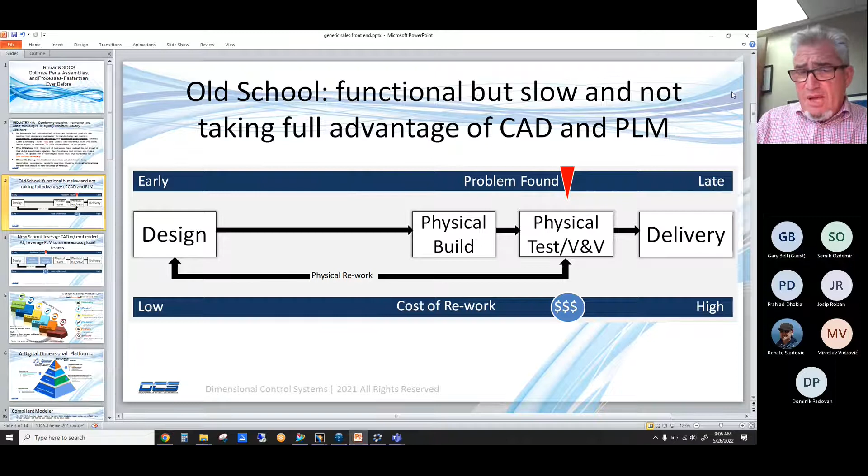We do a 3D model to still flip out a 2D drawing, but when there's changes from the customer, when there's issues with tooling, when there are design requirement changes, the back and forth takes a lot of time, costs a lot of money, and impacts launch, impacts quality and production. But now you've got CATIA, you've got the 3DEXPERIENCE.

Our fundamentals are tolerances and assembly moves, how your parts index to each other, how they index to a tool. But you can also embed that information in the experience. So you can embed GD&T in CATIA. We'll extract it with a button click. You can extract the assembly sequence in CATIA. And if it's set up right for us, we'll extract it with a button click. And this is putting our customers in a position where, of course, you've got to do physical builds, but you get to that point with a lot more confidence and much faster than ever before. And now when the customer makes changes, you'll have the ability to respond very quickly.

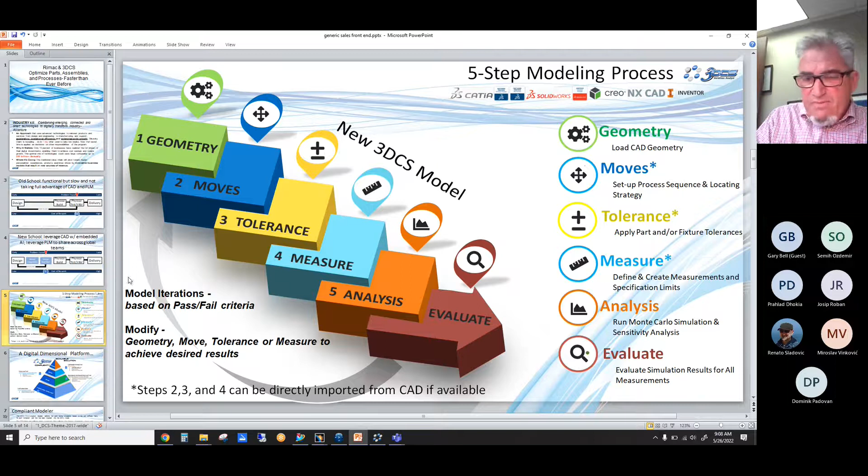These are our fundamentals. And I'm going to turn it over to Gary. And don't hesitate to ask Gary questions as we go through the demo today. We are going to share an electric motor with you, so it should be quite appropriate. Gary? All right, thanks for joining, everybody.

So when we're going to do a 3D tolerance analysis integrated, we refer to it as a 5-step modeling process. We start out with the design. Because we're integrated in the CAD system, you just open up your assembly and you can go to our workbench and start. We have to define how the detail components index to each other. In our workbench, we call those moves. That can be done by us, or if in the CAD system you're using CATIA's joints and constraints, then we can directly import those, and step 2 would be automatic as opposed to creating them in our workbench.

We have to tolerance our detail level parts to represent the expectation of the quality of the detail components. That's the GD&T that you would put on the drawing. That can be done in our workbench, or if you happen to be using CATIA's FTA, functional tolerancing and annotation, then we can directly import that in step 3. It becomes automatic. We have to write measurements where we want to validate our design from a dimensional standpoint.

Gaps, flushes, clearances, virtual clearance to make sure bolts pass through. Those are our measurements, which again can be written in our workbench. But if you have assembly GD&T or assembly FT&A, we can pull that in as our measurements. Because the goal is we want to know that our part tolerances and our assembly method will meet our assembly dimensional requirements. So there's really 3 main inputs: moves, tolerances, and measures. And then you're going to click a button, run an analysis, and we get to evaluate the results.

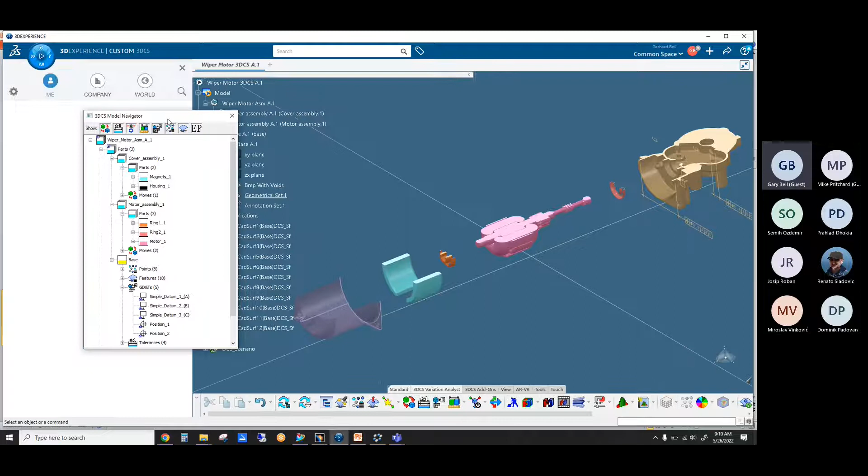So with that, I'm going to jump over to 3DX. This is 3DX 22X. It's easier for me to say V6 if you guys are okay with that. Inside V6, if you go into the compass, when our software is installed, we are right here, 3DCS. So you just click on 3DCS and you get all of our icons down here, and you can start doing your tolerance analysis. Now, one of the key things is we don't save any data on the parts. That would dirty up the parts.

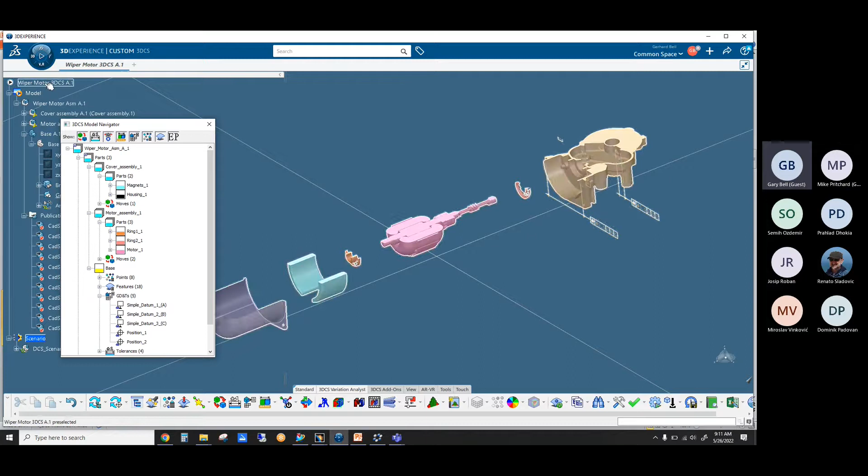If you're familiar with V6's manufacturing simulation or kinematic simulation, you can see up here with this arrow, that means I'm in a kinematic or manufacturing simulation. And then the model is inside that. And all of our data is saved here. There's our navigation tree, which is going to document the moves, tolerances, and measures. And this tree is linked to the CATIA tree, our tree, and the part. So if you see when I click around, it highlights it in both trees.

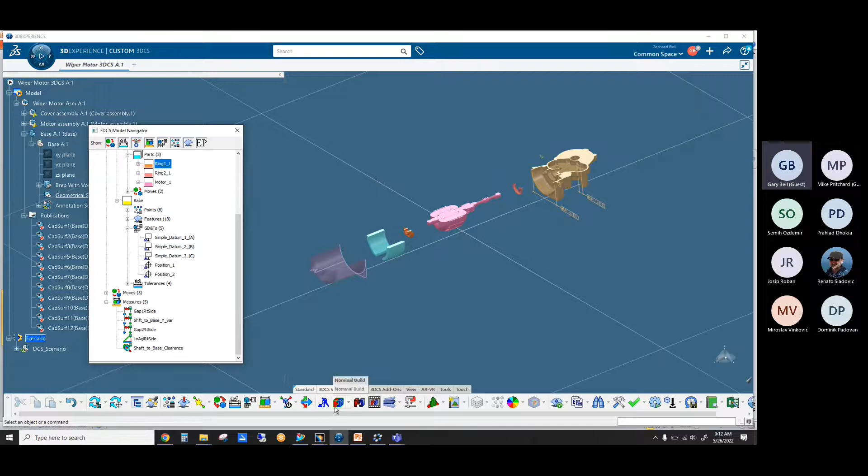The difference is in our tree, we have moves defined, we have tolerances defined, and we have measurements defined. You can see everything is graphic based, so if I mouse over the measurements, it's going to show you where the measurements are. If I mouse over the tolerances, it shows you where the tolerances are. And then this model is complete. So the first thing I'm going to do is I'll just assemble it and zoom in.

This is a cut section through a simple electric motor. And when I hit deviate, we can speed that up, I think. Okay, you can see this thing is jiggling around. Every time this number down here changes, we're building another motor assembly. Each motor assembly is going to be different because we're independently applying the random tolerances to the piece parts and then building it, similar to what will happen on the plant floor.

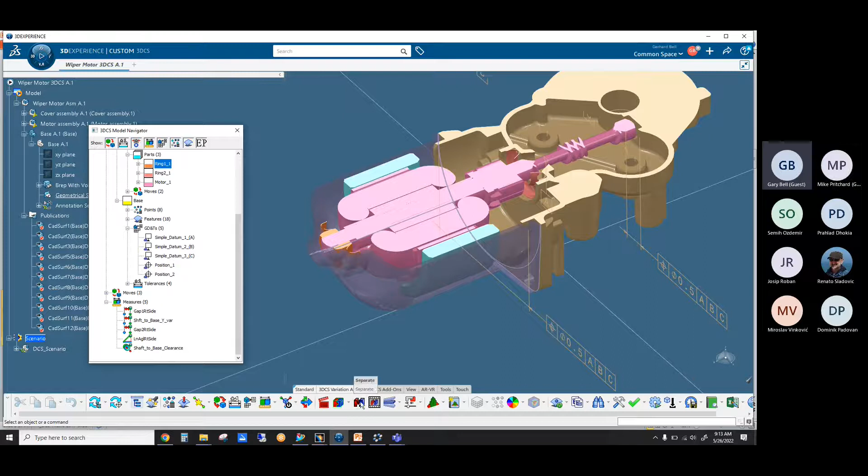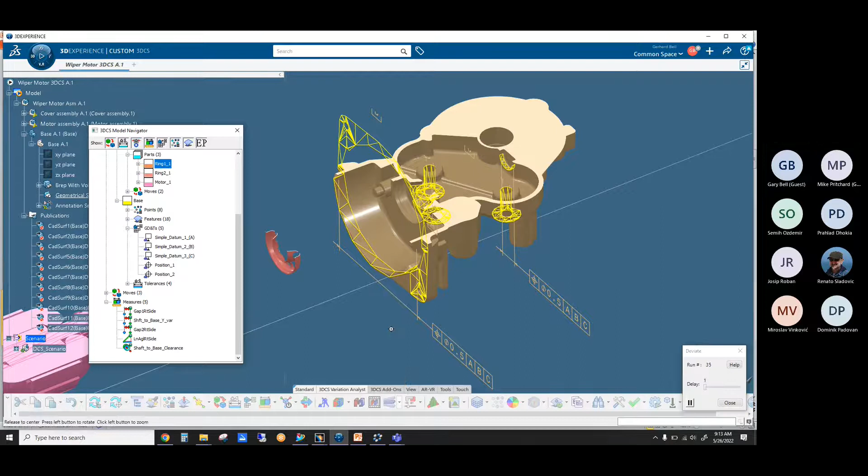If I separate this, I'm going to turn my mesh on, and we focus just on this part here. You can see this part's got some GD&T on it for the position of that hole and the position of this flange. And there's some other mesh on here. If I hit deviate in the separated position, now you can see things moving around. And this is us simulating these part tolerances. So this is that flange moving, diametrically 0.5 back to the part datums. So this is us simulating piece part variation.

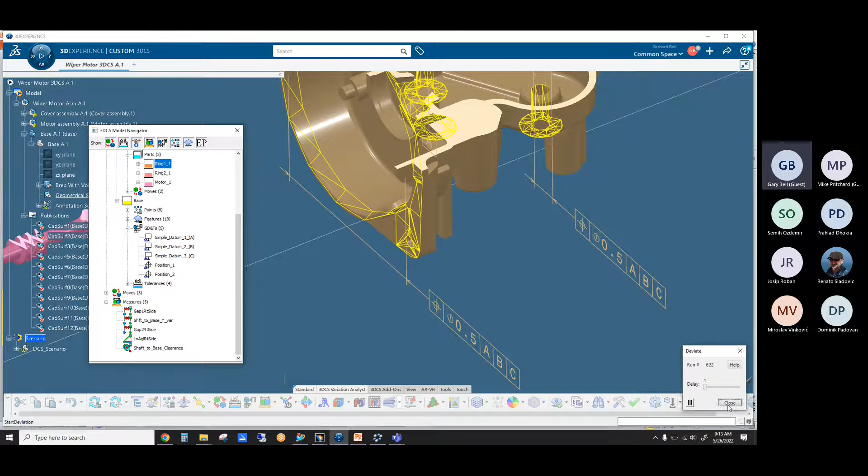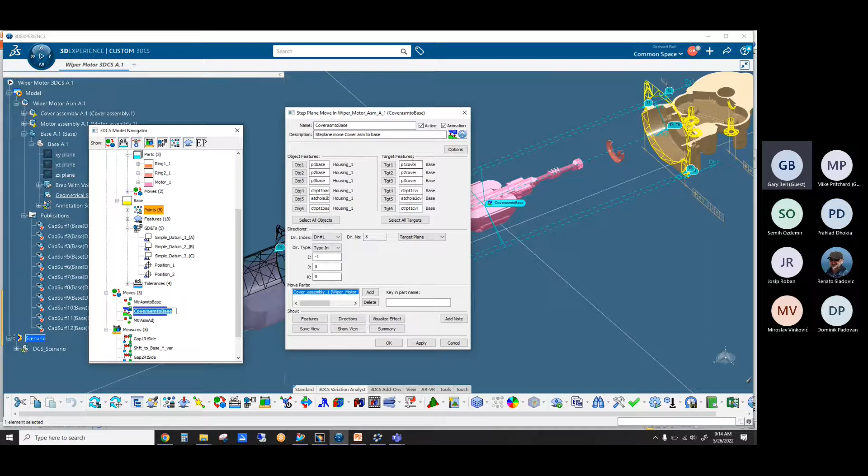And if I come down here and I click on the move, if I go into this move, you're just going to pick features on the housing and tell us what they locate to on the base. So this is the move that locates this cover to the base. And there's moves. You can see this model is a subassembly. So there's a motor assembly, which consists of the motor and some bearings. And there's a cover assembly, which consists of this magnet and the housing.

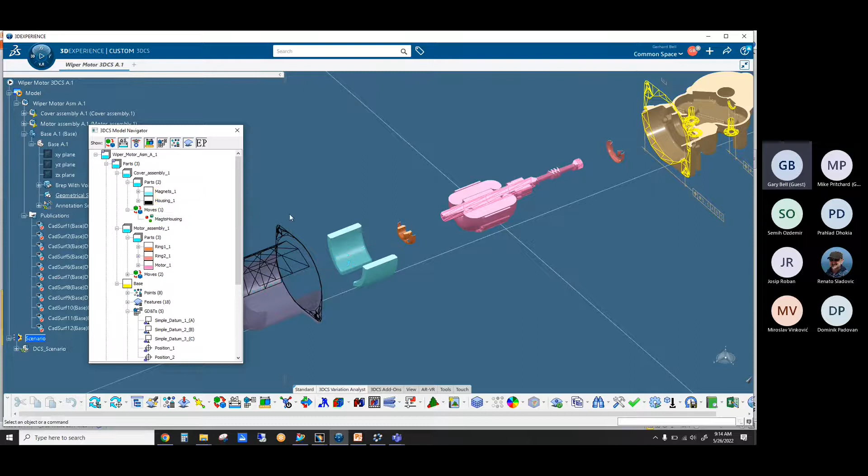And there's one move in here to locate the magnets to the housing. So these moves are going to simulate the build sequence. So then I can go through here. Oops, wrong button. I can go through here and I can animate through the assembly sequence. Oh, what happened there?

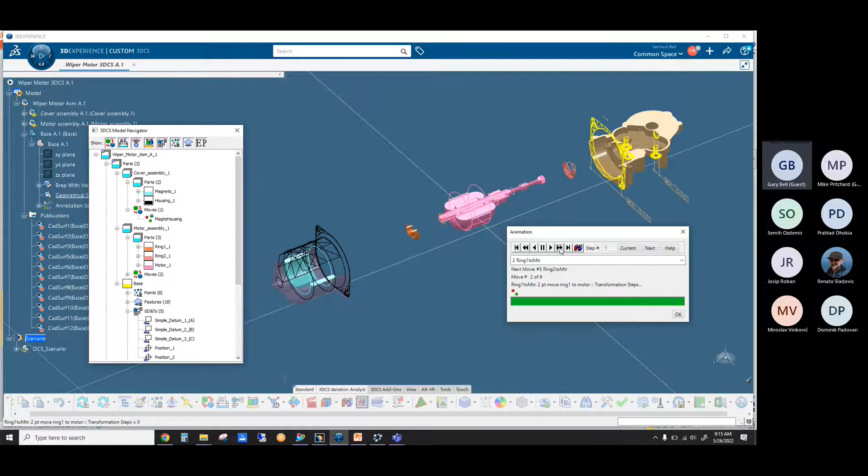Separate. Whoops. Separate. Animate. It looks like the solids has got a lag, but if I animate it, the magnet goes in, the bearing packs go on, the motor goes in, and then the cover goes on.

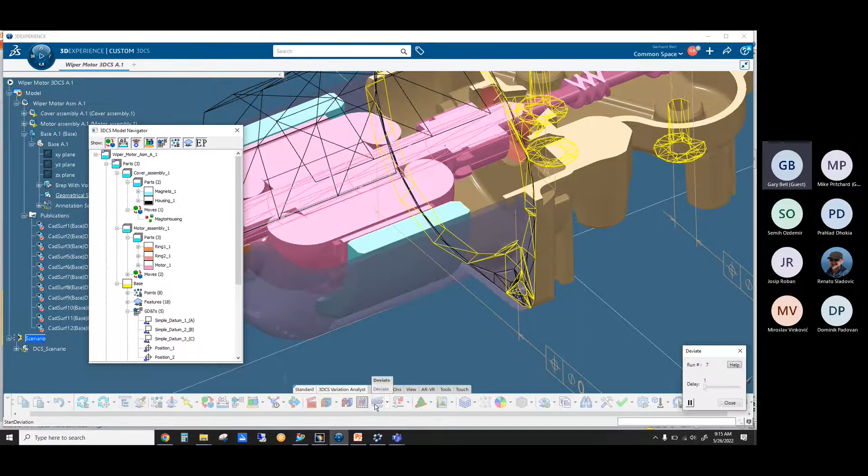So now if I zoom in here, because the move was this cover locates to that flange, when I hit deviate from here, that flange is moving, which affects where the cover goes. Where the cover goes affects where the magnet goes. That also affects where this bearing pack goes, which affects where the motor goes. So you don't have to think about a tolerance stack path. You just have to define how your parts go together.

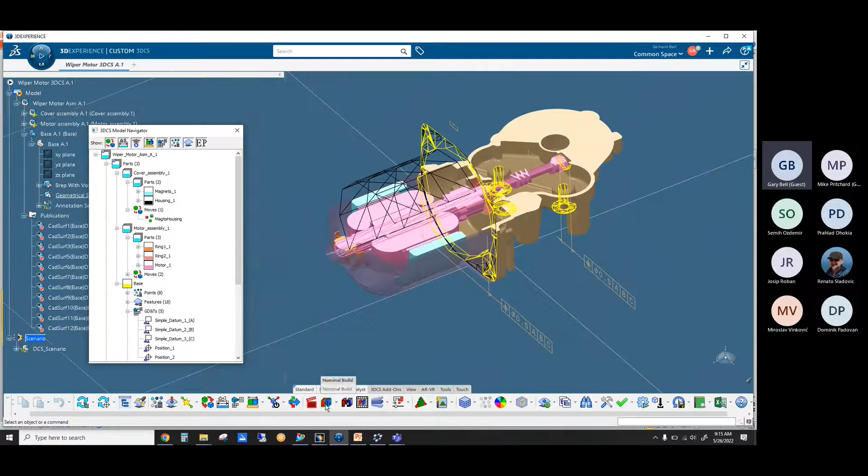Let me turn this back off and go into this measurement. So we're going to focus on these two measurements. You can have as many parts and as many measurements as you want in the model. The capability is only restricted by the computer and the capability of your CAD system. We pretty much ride on top of that.

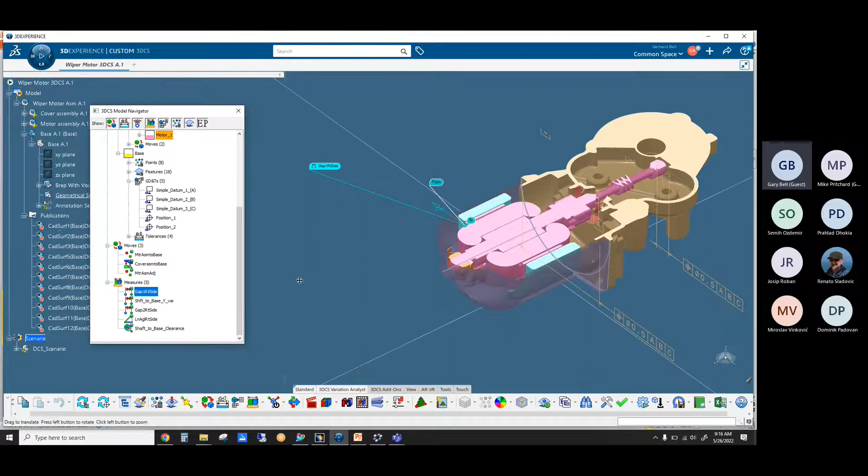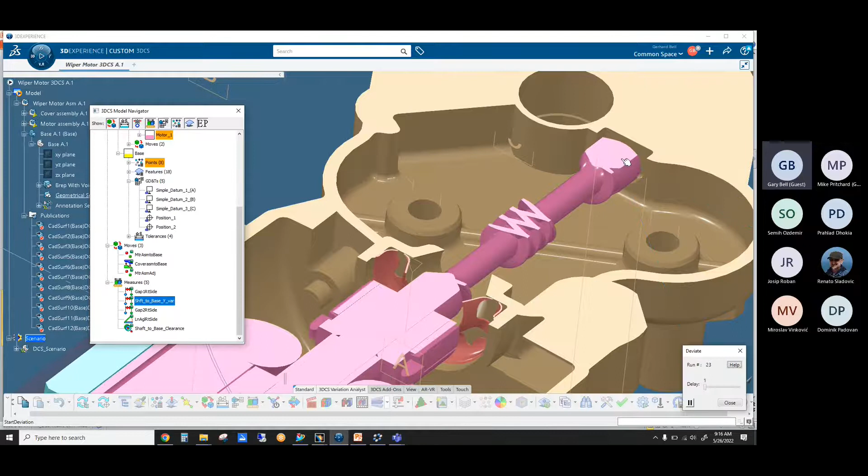But we're going to look at that gap measurement, which is a gap between the armature and the magnet. And we're also going to look at the variation between the end of the shaft and this cutout right here. So if I hit deviate from here, that's our concern. How much is that moving? And what's the gap going to do here?

Oh, I think I forgot to plug my laptop in. Hold on. Just a second. Sorry, this is being recorded and I'm running out of juice. Okay, I could tell because my screen just got dim.

So if I do a nominal build and we go into this measurement, you can see the nominal gap between the armature and the magnet is 0.4 millimeters. This is our goal. We don't want the gap to get less than 0, because the armature scrapes on the magnet. And we don't want it to be bigger than 0.7 because then the efficiency of the motor starts to decrease.

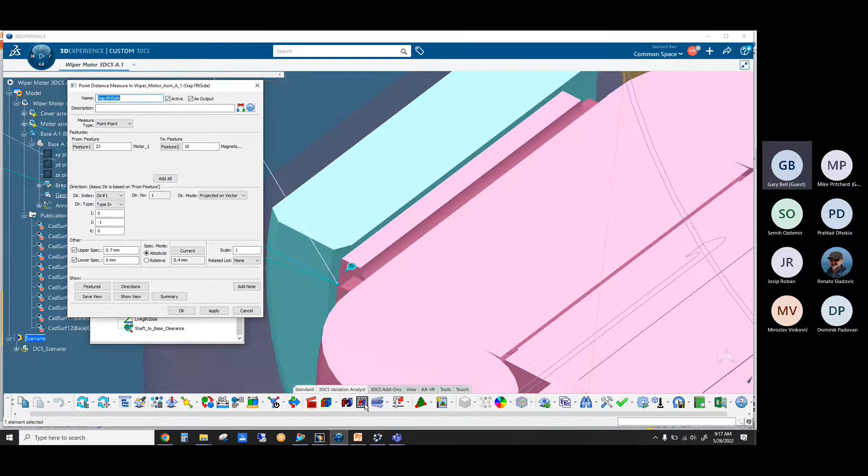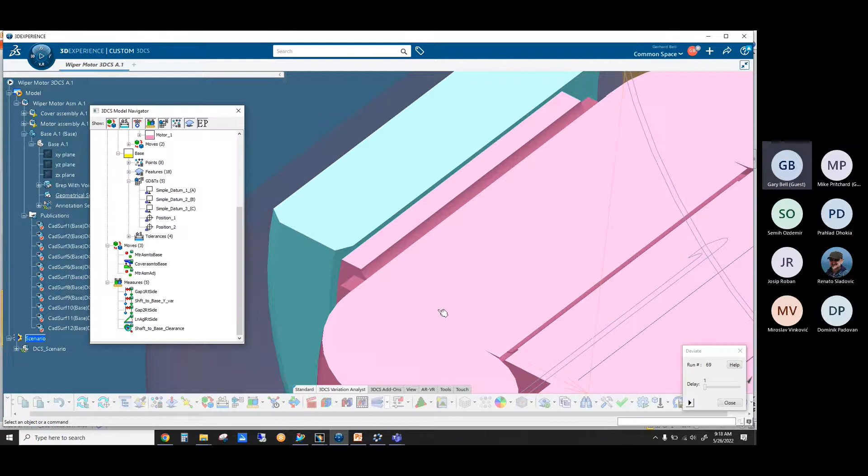So from here, if I hit deviate and I pause it, build number 41, the gap is 0.512. If I do it again, build number 69, the gap is 0.55.

So once you define everywhere you want to measure and you tolerance your detail level parts and you write your moves to assemble it, that is done, by the way, with this icon to write the moves, this icon to tolerance the parts, this icon to write your measurements. As you were watching, these are all graphic animation. Separate it, build it, deviate it. Everything you do is graphic based, so if you make a mistake, you pretty much are going to see it.

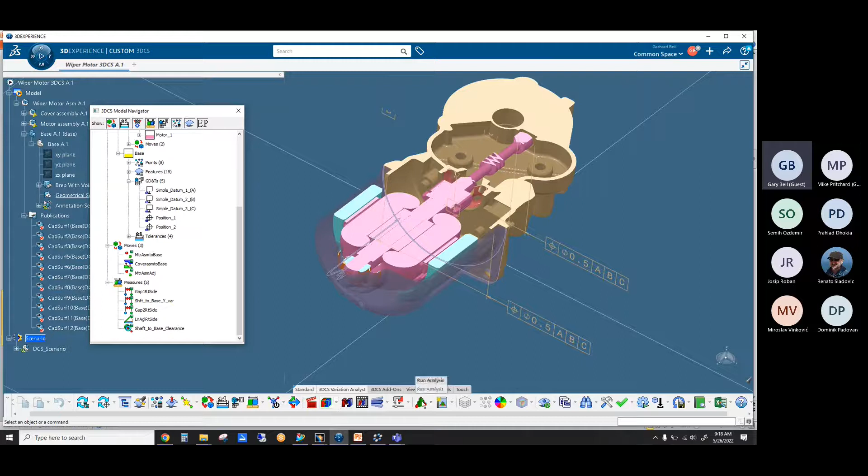But then if I nominal build it, now I'm going to run an analysis. So here I'm going to build 2,000 motor assemblies. And I only have 5 measurements in the model. That's what you're seeing here. So this is kind of a summary, first phase summary of your results. And this is, get this over here.

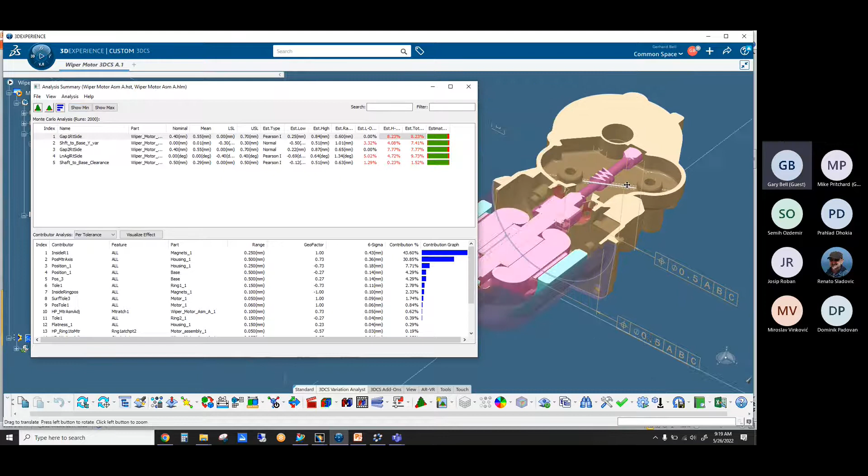So you can see as I click through the measurements, it jumps around on the graphics, showing you where you're measuring. This is showing you that the gap is 0.4, a mean of 0.5. The lower spec limit is 0. The upper spec limit is 0.7. And you have your estimated curve type, estimated low estimate. There's all kinds of statistics. This is just some of them that we have turned on. And if you look at it here, you can see that it's failing 8.23%, which you're seeing with this red here.

And then these are the tolerances. This is essentially your stack study, 0.25, 0.5, 0.25, 0.5, 0.5, 0.15. And it's telling you which tolerance, in which part, what was the input tolerance, this geofactor, which I will get to in the next measurement, the effective Six Sigma of this tolerance, and the percent cause of variation.

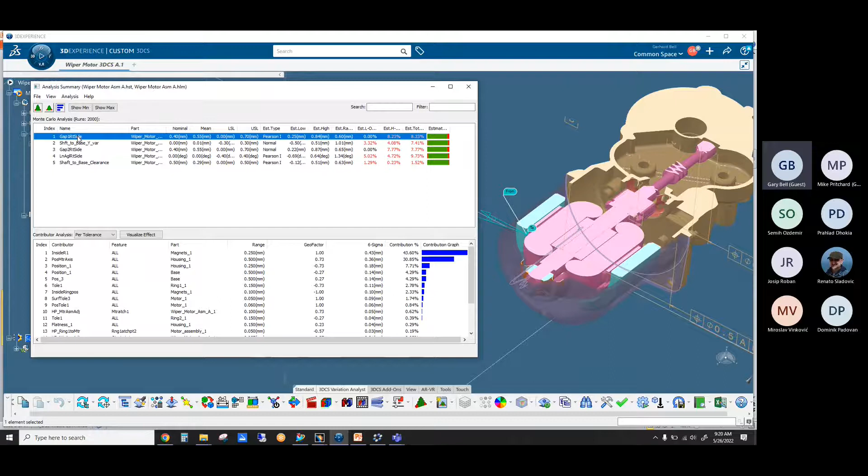If you want to drill into this deeper, I'm going to double click it. And so now we can see, here's our spec limit set to 0 and 0.7. And there's the failure that we're getting, the 8.23. And at this point, I like to separate the model

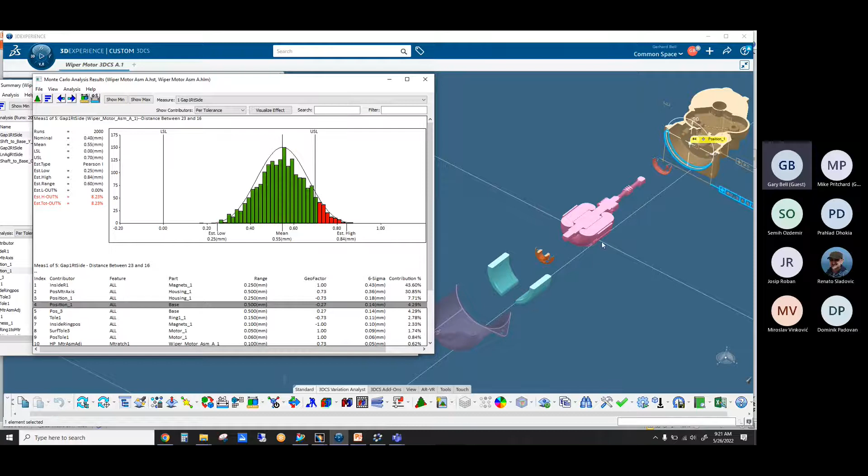because I can click through these contributors and it will highlight. First cause of contributor is the tolerance on the magnet. Second one is the position on the cover that the bearing pack locates to. Third one, the position on the cover that the magnets locate to. Fourth one, there's the flange back here that locates the cover. So we were talking about how all these things stack up based on their geometry.

If I go to the next measurement, which was measuring the end of this shaft to the center of this hole, you will see my input tolerances are all 0.5, 0.5, 0.5, 0.5.

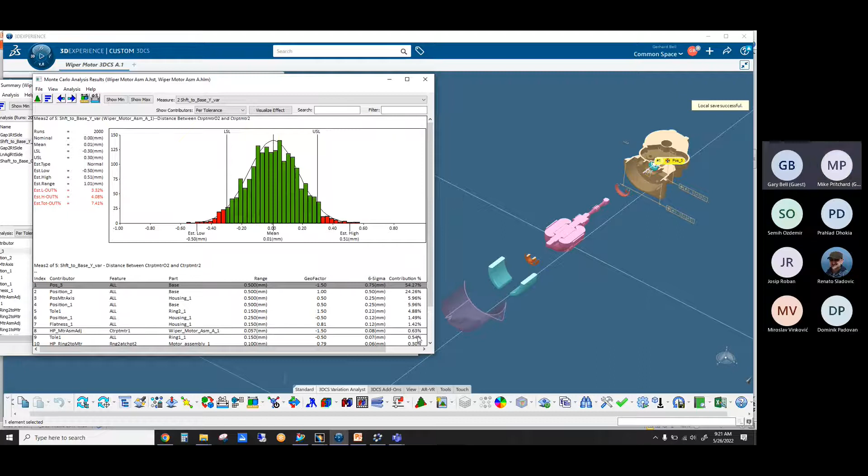Then you got some smaller tolerances here. But this 0.5 is 54% of my variation. Well, if this was a simple straight stack, then, if your tolerances are all the same, they're going to have the same percentage broken down. Of course, this adds up to 100%. But this is showing you that even though my input tolerance is 0.5, it has a geofactor of 1.5, which means it's acting like a 0.75 millimeter tolerance on this measurement.

So this, and it's easy to see, this is why we like this model as one of the demonstration models, is if I'm attaching this shaft here and here, you can see the number one contributor, come on back, is where the bearing pack locates into the base. So if the opening that the bearing pack locates shifts to the left by 0.5, this is going to shift to the left by 0.75 because it's extended outside of my locators.

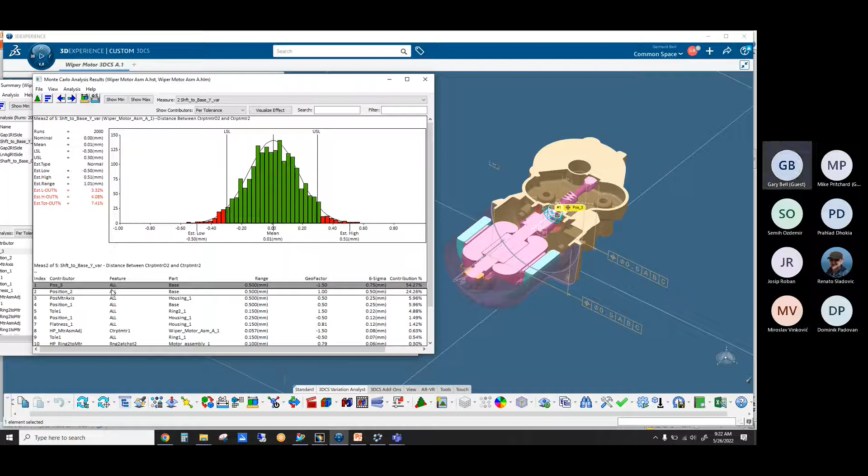All of the tolerances in the list you can individually interrogate. So if I click on this and say visualize effect, and I say continue, now we're just deviating that tolerance on the base. Everything else you can see up here is held fixed. So you can get a visual of, oh, I see how this 0.5 millimeter tolerance is amplifying what's going on out here.

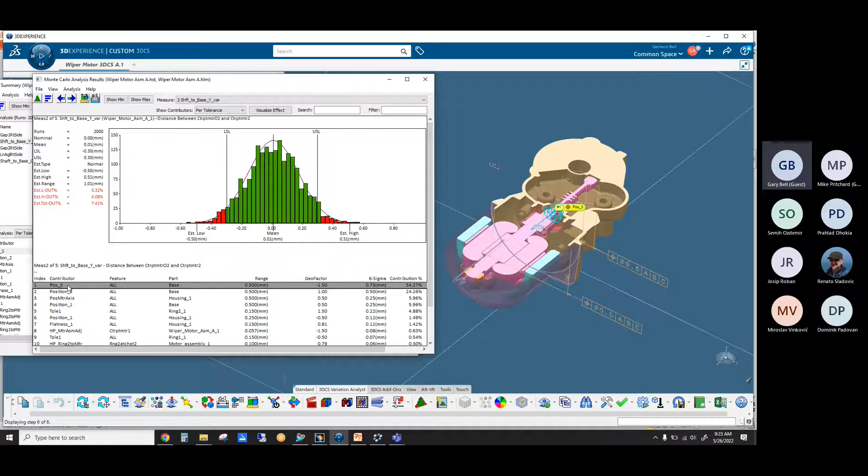So if we look at these results, the total range of variation is 1.01 range, or plus or minus 0.5. We're failing 7.4%. That's what you see here. This is my number one contributor. So, if we want to say, let's quickly see what happens, we'll double click this. It will go into the tolerance. And I'm going to change it to 0.25. And then I will rerun it.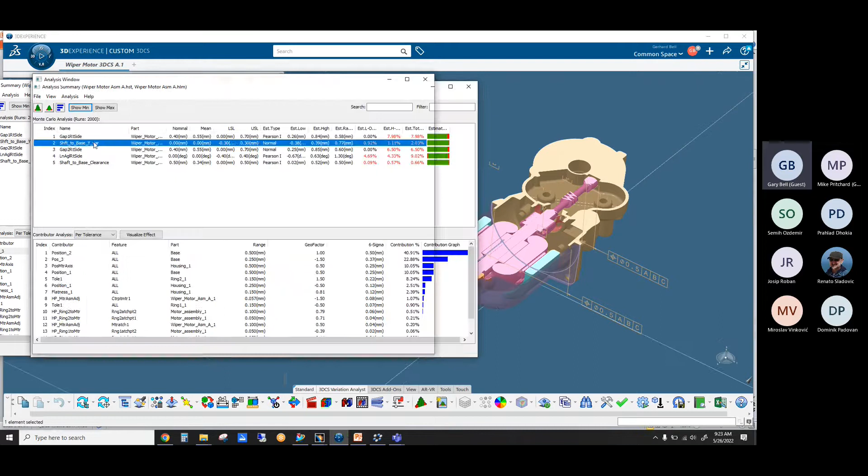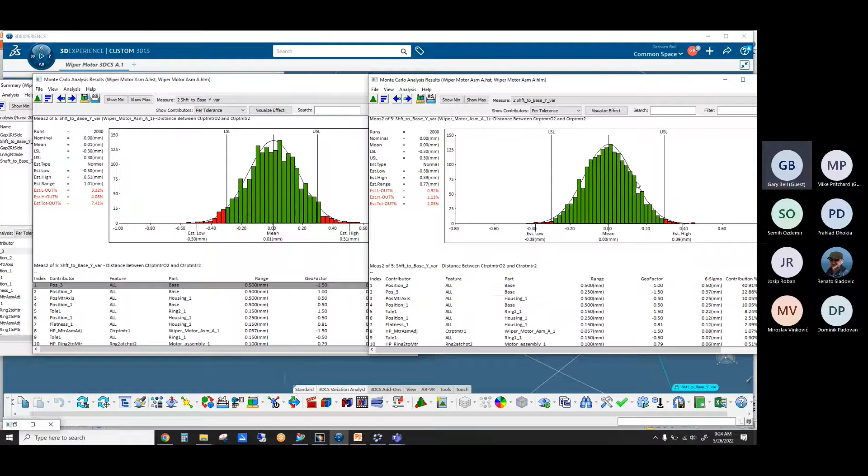We'll go back into this measurement. Got to get this, minimize this. And so now we got side-by-side variation. I went from 7.4% out of spec to 2% out of spec. That position 3, which was my number one contributor, it's now the number 2 contributor. You can see the GeoFactor number didn't change. The only way that number is going to change is if I modify how this shaft is located.

So once you get to the results of all your measurements, if they're in spec, great, you can move on. If they're really in spec, so if you look down here and you got some tolerances, you're holding this tolerance to 0.15, and it's 0.9% of my overall variation, maybe you can open up some of these tolerances that have little effect on your critical measurement. Or you can see what I just did was I tightened the tolerance that had an effect on my critical measurement.

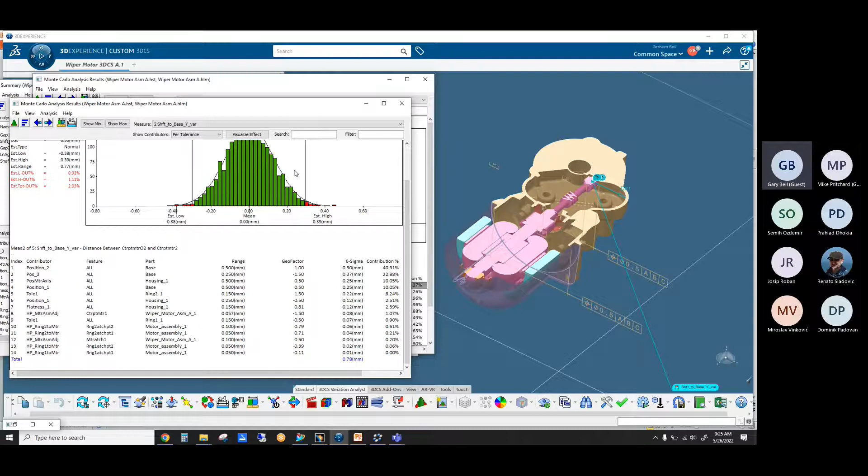So once you get your model complete with all your moves, tolerances, and measures, and you run the analysis, at that point, if your measurements are not meeting your goals, you can change the tolerances, you can change the location method, you can change the design altogether. All of this is done before we make any parts. We're just trying to analyze our design before we start physically spending money on real stuff.

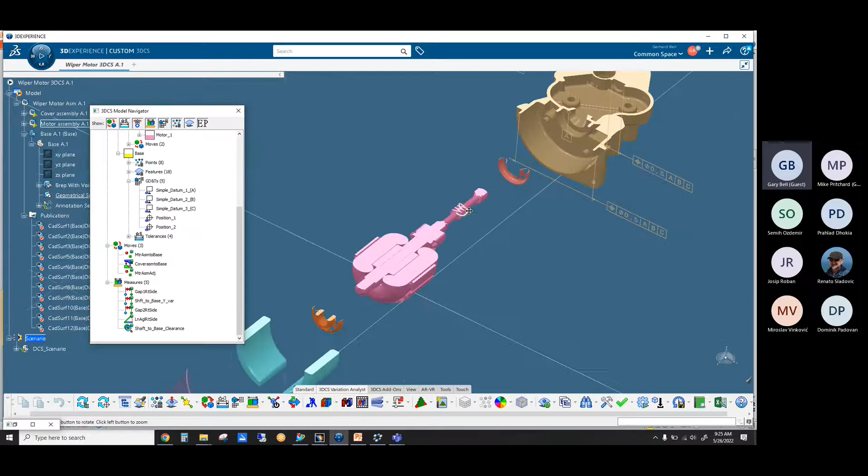Because we're integrated, we can utilize some of the powers of the CAD system. For instance, I'm not going to do it because I'm not a V6 designer. But if I turn my mesh on again, this mesh is linked to that feature right there. So if the designer modified the diameter of that feature, our mesh would still keep its original diameter because we don't ever want to have a tolerance analysis model produce results that all of a sudden you can't replicate. But because we're in the CAD system, we can update with the model.

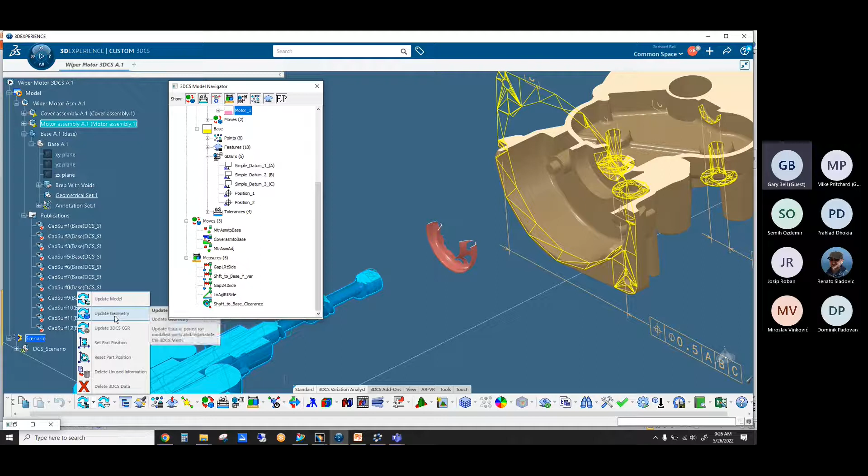So if I finish this model and 2 weeks later, I opened it up and this diameter was smaller, I can come over here and say update geometry. Then our mesh will update to the location of the new geometry. If the designer deleted this diametrical feature altogether and created a new one that was smaller, well, now we lost our connection, and this feature linking wizard here would be used to tell the software that this mesh now belongs to this new surface.

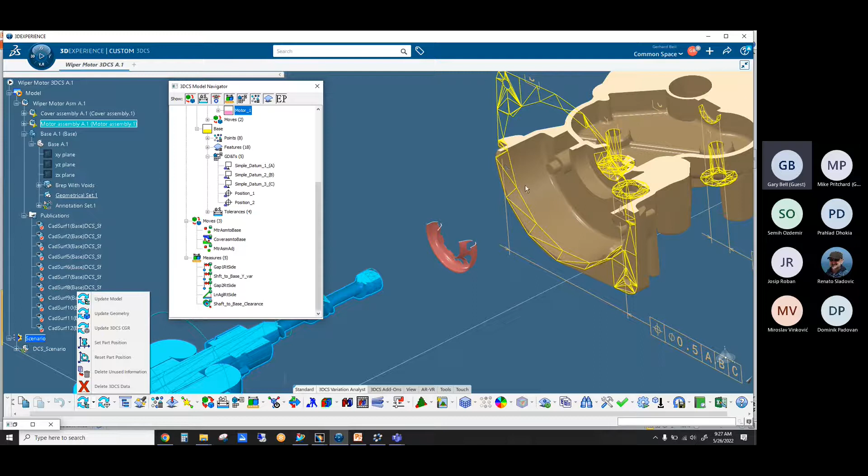Also, you can see this part has got embedded GD&T on it. So if you look over here, this is the GD&T that we pulled in. I'm going to go ahead and just delete this.

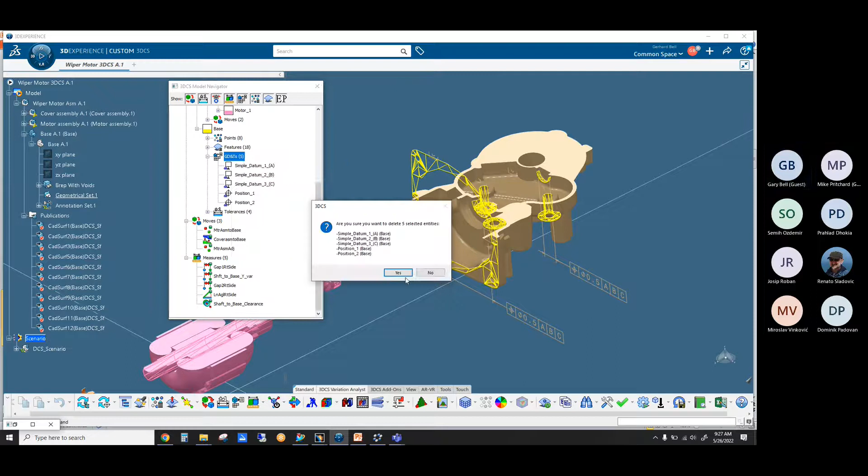So now if I hit deviate, you can see there's nothing moving here. This is moving. That's a different tolerance. That's not applied by these two GD&Ts.

But because I can see this part has embedded FT&A, then I come over to this button and I say extract the GD&T. I pick the base. It says I found 5 GD&T callouts. Okay, exit. Now you can see it's here again. And when I hit deviate, now it's moving according to this GD&T. This symbol indicates that the GD&T was pulled in from the CAD.

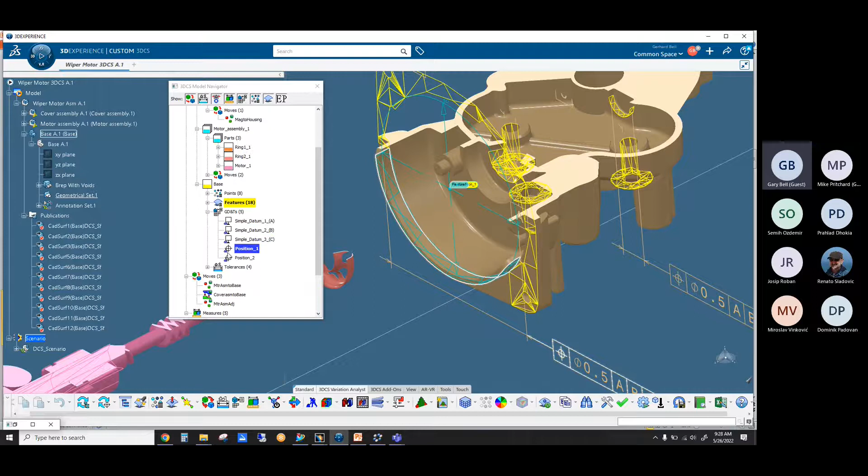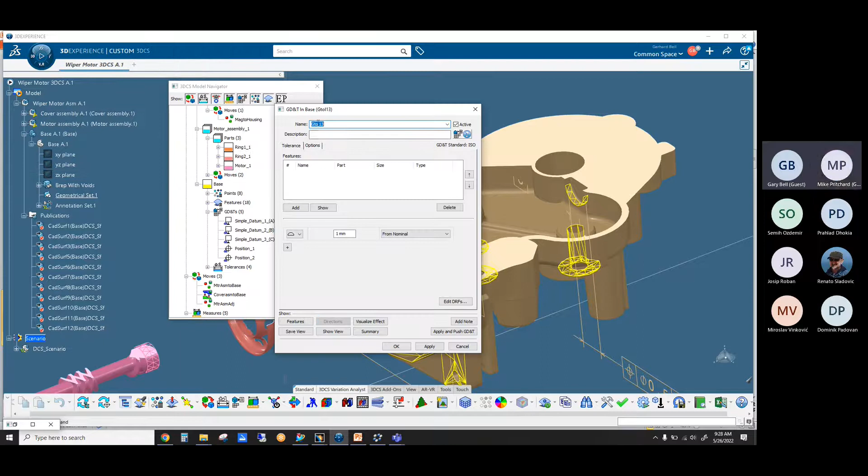To give you an example of using our icon down here, I'm going to say I want to tolerance this part. These are all the tolerances that are already on it, which are these. I want to add another surface profile. Add. I can change the name. And I want to add that surface profile onto this surface and this surface. So now you can see those two surfaces got a mesh because now they became functional to our model.

And I want to tolerance it back to A, B, and C. Okay. Now you can see down here, there's no little blue symbol. So this was the tolerance that was written in our workbench. These were tolerances that were pulled in from the CAD. And if I hit deviate, oops, cancel. If I hit deviate, now you can see those surfaces are also moving within the defined tolerance.

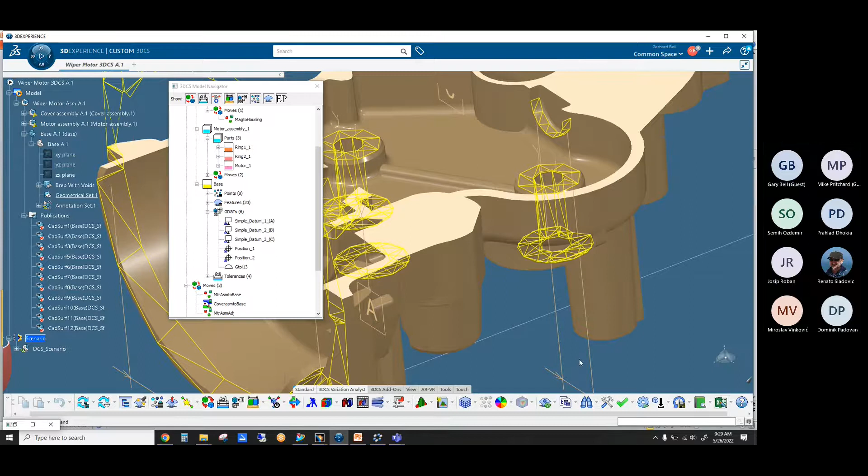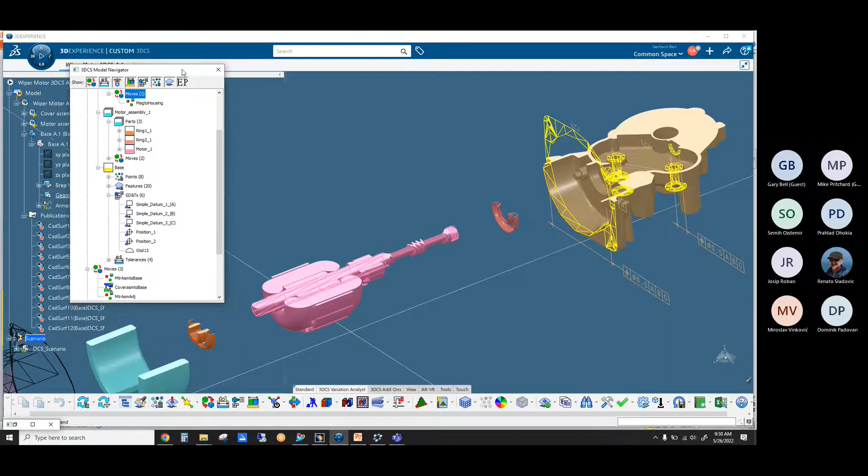Maybe I have one. Can you maybe apply general tolerance on the whole part? No. Sorry, Gary. You asked the question, right? No, it's me, Josip. Josip, well, probably you connected from two devices. I think I heard myself from Gary's device. Okay, so it's not on you. Okay, sorry for the interruption. Please keep continuing.

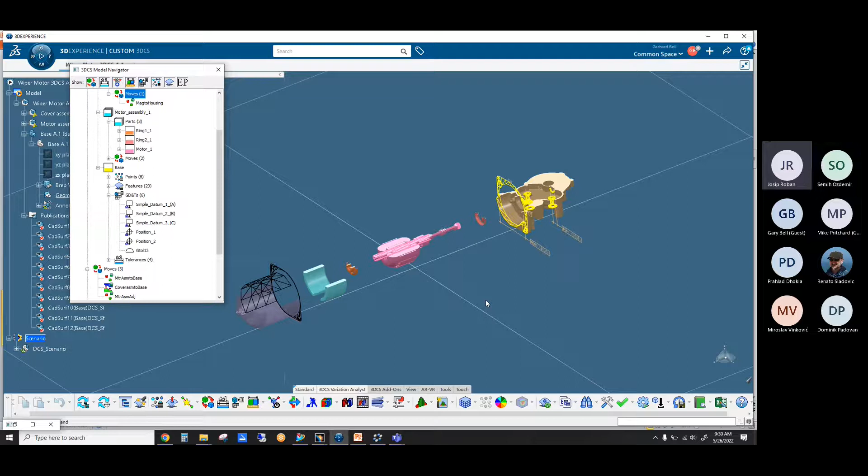I want to ask, can you apply maybe general tolerance on a part? For example, if we have a plastic component and we know that that part is TG4 tolerance on the whole part, can we just apply the dimension? No, we can't do that for a couple reasons. Looking at this part right here, the only thing that's functional on this part right now is this front flange and this circular feature, because that's what locates the cover. This feature here, because that's what locates the bearing pack, which locates the armature.

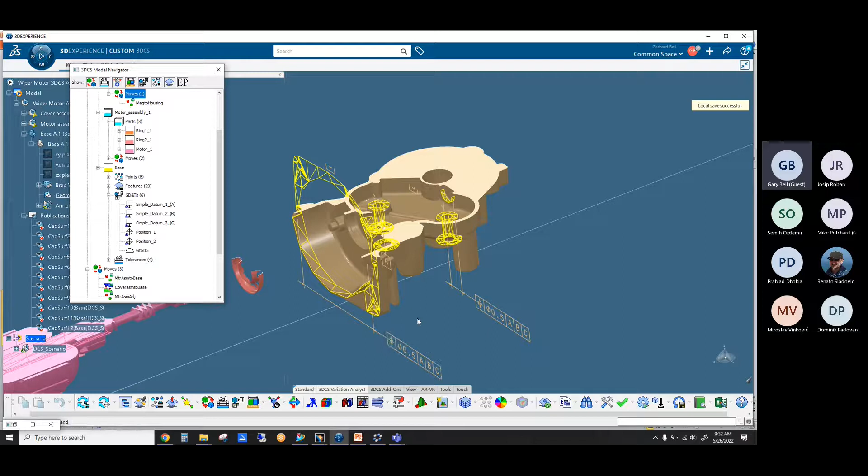If we tried to do a general tolerance, every feature of this part would get toleranced, and then we would try to vary it, and it's going to slow the system down for a bunch of features that are non-functional. And the other argument is that if it's toleranced to a general tolerance, then in general, it's not a critical tolerance to the system. It's there to cover, hey, in case we forgot something. We want you to put some GD&T or define the tolerances for the features that are functional on this part. So that was my long answer. I guess the short answer is no, we can't. Sorry. Okay, thanks. That's a good question, though.

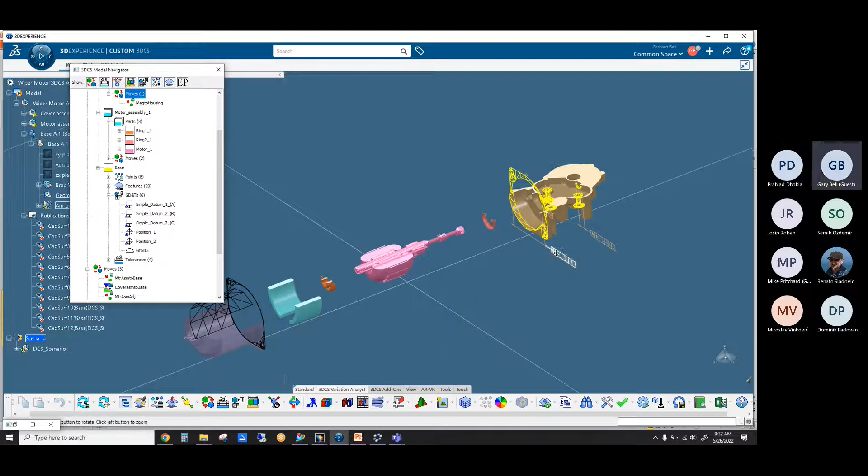Just one from me. So you've obviously applied specific tolerances to specific features, and you've called out datums ABC. So do we also have to specify where the datums are, which surfaces or which features? No. You don't have to. In our software we can deviate it back to datums. That's really critical if you have subdatums. Like if you have a hole toleranced back to A, B, and C, then that's D, and then another hole toleranced to A, B, and D. But if you don't have any of that, you can just do something like this.

If I double click here and I say position, add, I'll pick this feature here. So now I'll put a mesh on that feature. And you can see in this pull down, we have from nominal, no DRF, or a datum system. So if I just leave it to from nominal, this gives me a great opportunity. Our software is really smart.

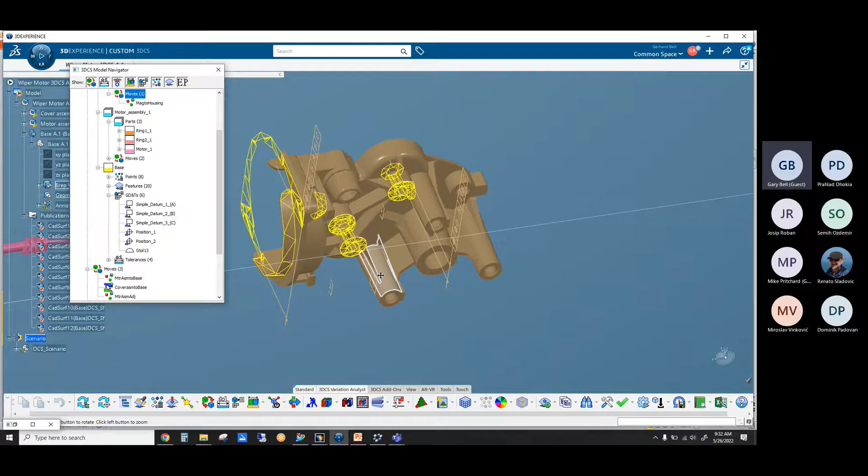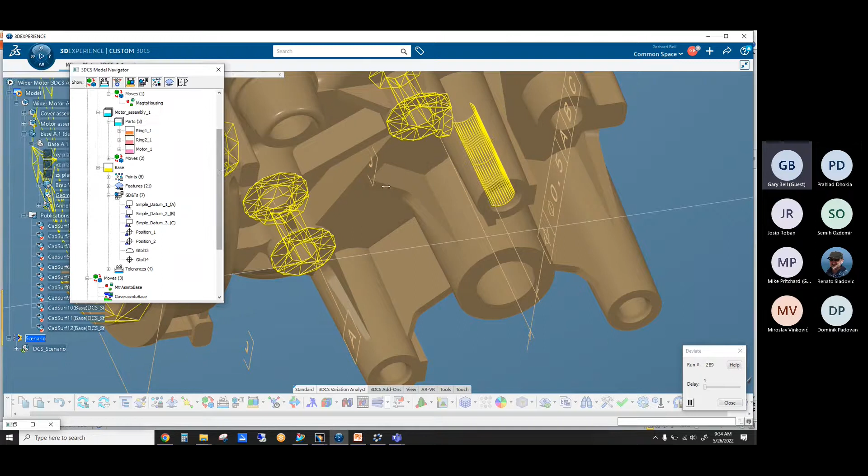And it's telling me, hey, I have an M in here. Now I'm trying to put a position of 1 millimeter at MMC. But if I don't have a size tolerance defined, I can't do an M. So that's just a warning. I'm going to say, don't exit. I'm going to take that M out of there. And now it will accept it. And if I hit deviate, now that hole's moving around for its position tolerance. So I always have a bad habit of wanting to show, but yeah, you don't have to have the datums. You can tolerance it, just tolerancing it.

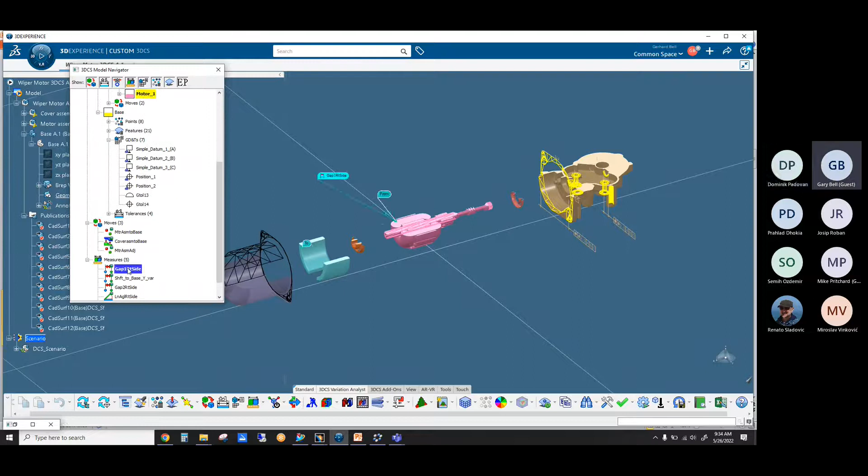Is that good? Sorry, I have a question. You showed before, on the example, that 8% were out of the requirements. But where did you practically set up the requirements? Maybe I missed it. The requirement is set up in the measurement.

So this is where, let me build it again. So the design gap is 0.4. Inside our measurement, because this is not a tolerance, this is what we're trying to validate. So the parts have tolerances, the moves build it. The measurement is where we state that gap has to vary no more than 0.7 or no less than 0, because if it's 0, it's scraping.

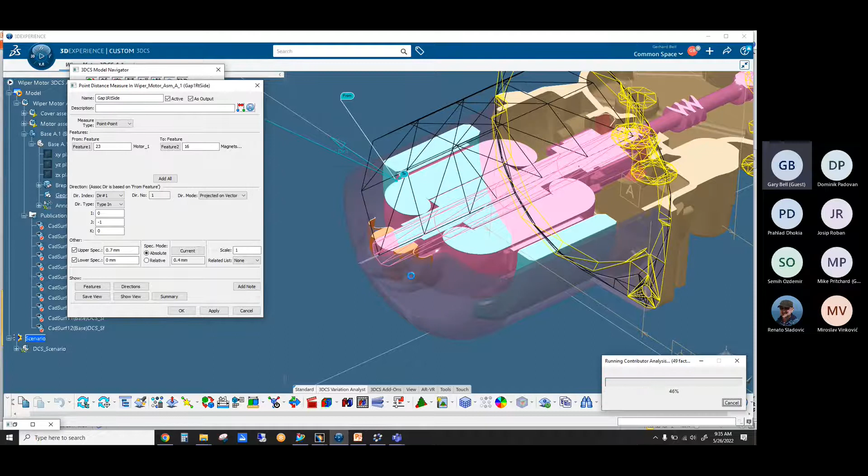So then when we ran the results, we'll run it real quick again. Hope I didn't change some tolerance that's going to break things up. So if I go into this measurement, the requirement, this 0 and 0.7, was set when I wrote the measurement. And then when we run the results, every build, we check it against this requirement, and we stack all the data on top, so you can see here's the variation of that gap.

And because we know this max is 0.7, that's how we're getting this failure of 8.14, which is just here. You can see I have no failures on the low side because this doesn't come close to crashing into the magnet. Mm-hmm. Yeah, understood. Thank you.

But let's say that here we, for example, didn't apply any CPK indexes. Would it also be possible to say that a certain tolerance has also applied a CPK index? Yes. First, I'm gonna go in here because this is actually a great example. I'm gonna go into my statistical output, and I'm gonna put PPK on, because now you can see based on this data and my spec limits, this has got a PP of 1.

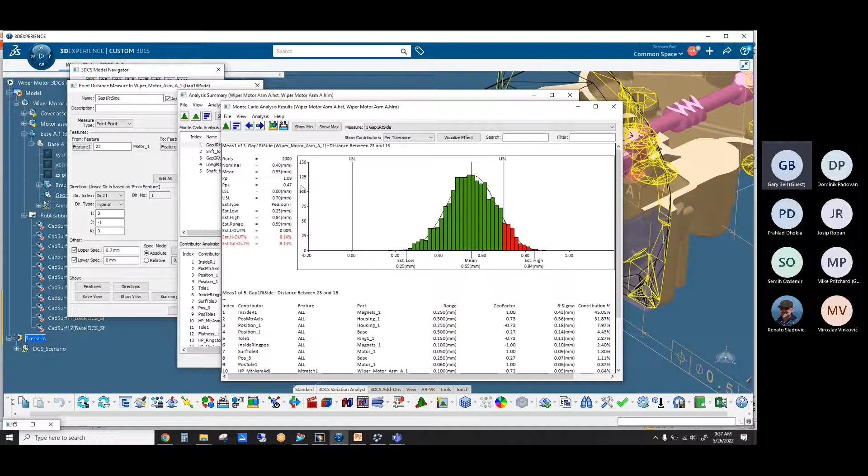That's pretty good. That means the range of this is getting close to the range of my spec limits, but because there's a shift, my PPK is 0.47. Now in our software, we talk about PP and PPK instead of CP and CPK because we use all the data in our simulation. In the plant, you make 5,000 parts and you check 100, that's why you're using CP, CPK. But I got sidetracked because I wanted to turn on some more statistics. To answer your question,

if I go into this tolerance, under the options, you can choose your distribution type. And then if it's a normal distribution, you can set your sigma value here. This is a sigma value of 3, plus or minus 3 sigma. So it's 1 millimeter 99.73% of the time. But you can set your sigma value.

I don't know how to explain it. It's done here, but it's not typed in as a CP/CPK. It's basically typed in as a sigma value and an offset, in effect. Yeah. Okay, understood. Thank you.

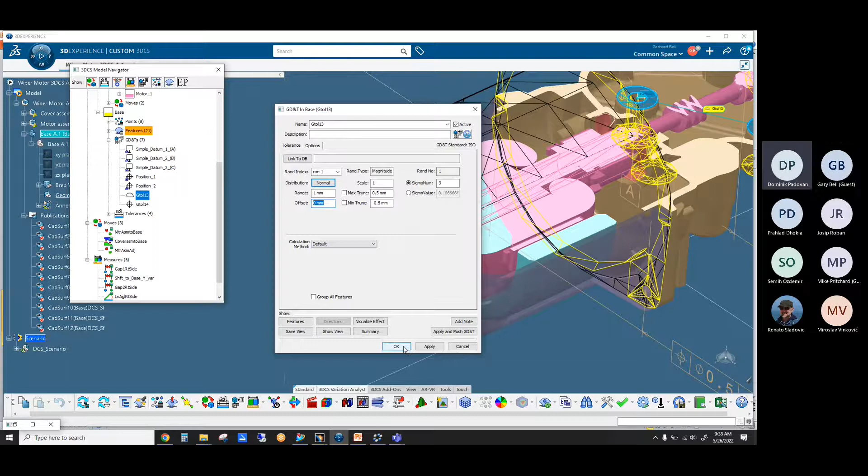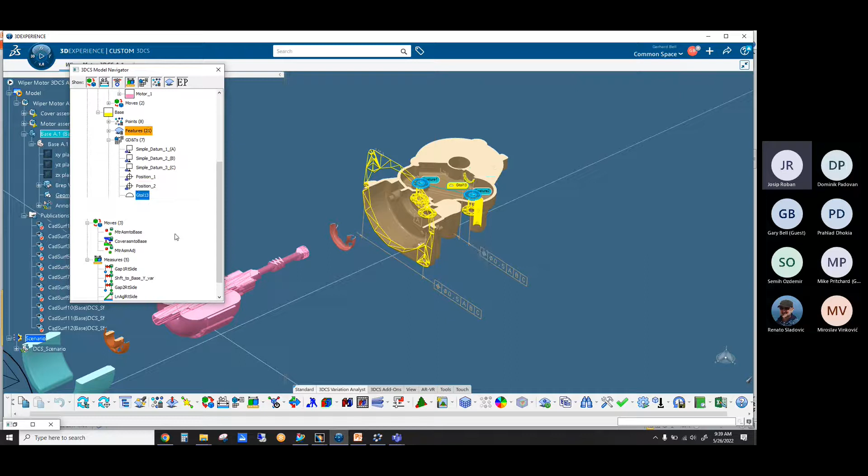I have one more question. When you added the GD&T tolerance in this assembly, you showed that that tolerance is not linked to a part. Yes, this one. And the top ones are linked. Do you put GD&T only in some separate module, or is it also part of 3DCS? No, it's part of 3DCS. The difference between these two, and this is a great question.

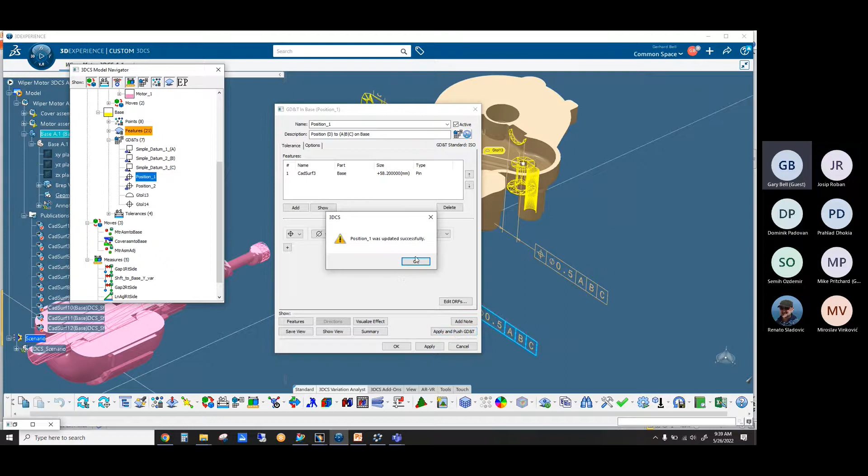Let's say I go into this tolerance here, and maybe when I look at the results, I decide I can open this tolerance up. I can push that tolerance back to the embedded PMI. So if I say apply and push, it was updated successfully. And it was supposed to update. I probably need to go in here.

It's 1 millimeter. You can see we updated it in the CAD. I got to get my graphics to update. Oh, there we go. So now it just updated. So any tolerances that we pull from the CAD, we can change the numbers as we're analyzing our results, and we can push it back to the CAD.

This tolerance here that I wrote myself, that's in our workbench, and it's saved up here in the manufacturing simulation. It's not saved in the 3D part. If you wanted that tolerance saved in the 3D part, you would have to go back to your 3DEXPERIENCE and add it inside here. Because you can see this is the GD&T in the 3D part. And this is the GD&T, which happen to be the same because we pulled it from these two. And then this one I added myself.

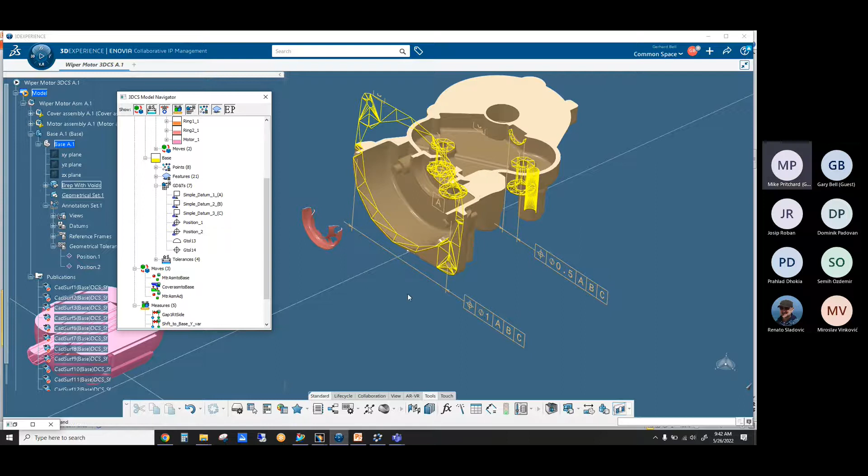And another point is that when Gary showed you those distributions, right, when you set up, we assume a normal distribution, but we've got a bunch of options for distribution, and one of those is a user-defined distribution, which could reflect measurement data.

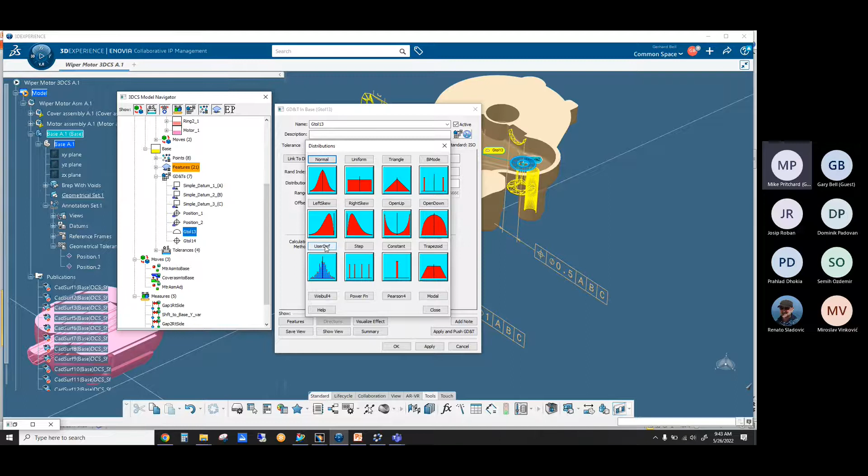So many of our customers are using a theoretical, right? You in mechanical engineering will get declarative or speculative about GD&T. You're putting on the drawing what was either on last year's drawing or is now optimized based on some kind of study like you did with 3DCS. But the reality of the plant can change that number, and we've got the ability to bring it in very quickly and rerun analysis to reflect the plant.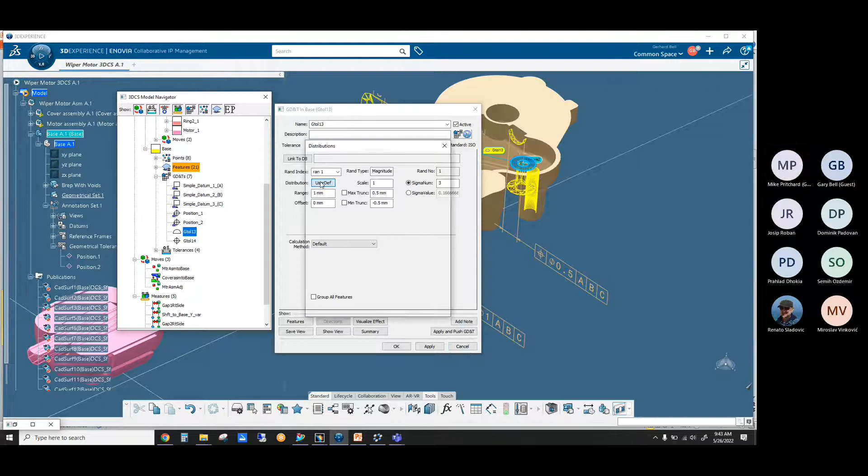Think about that also for your supplier quality. A lot of customers use 3DCS to confirm their suppliers are in the spec before they ship the parts.

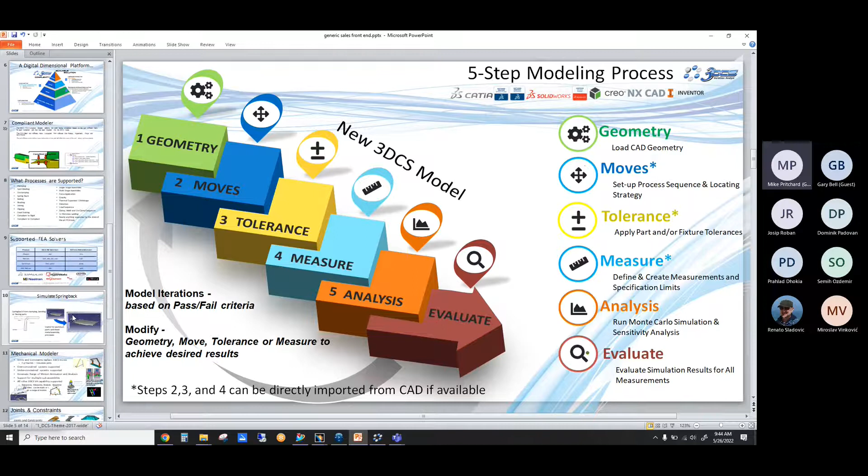A quick side note on advanced capabilities. Because of the nature of your products, I want to bring to your attention something that could be very interesting to you, and that's called compliant modeling. So what we do with compliant modeling is we'll grab your FEA data, we'll grab a stiffness matrix of your material, and we'll simulate deformation, over constraint, thermal expansion of the parts, how does that affect our assembly variation, forces, gravity.

So we have customers who use the 3DCS variation analyst. We have to assume the parts are rigid, but we've added on a bunch of extra functions that include not only compliant modeling, but mechanical modeling for kinematic assemblies. We've got gear modeling now.

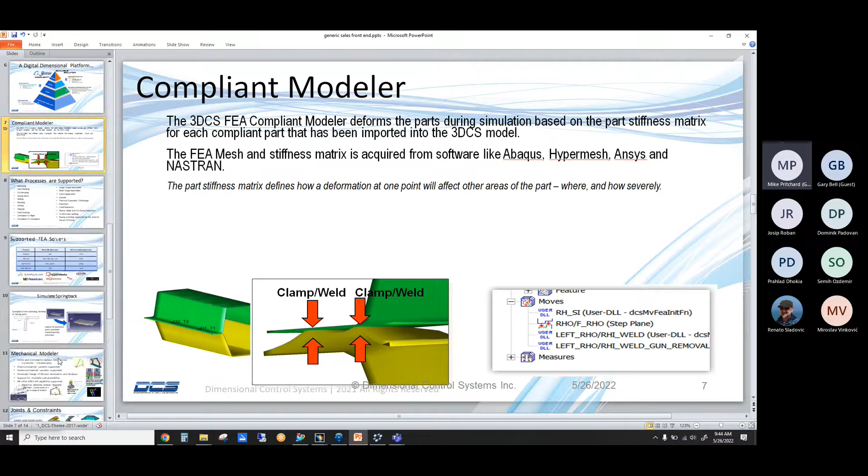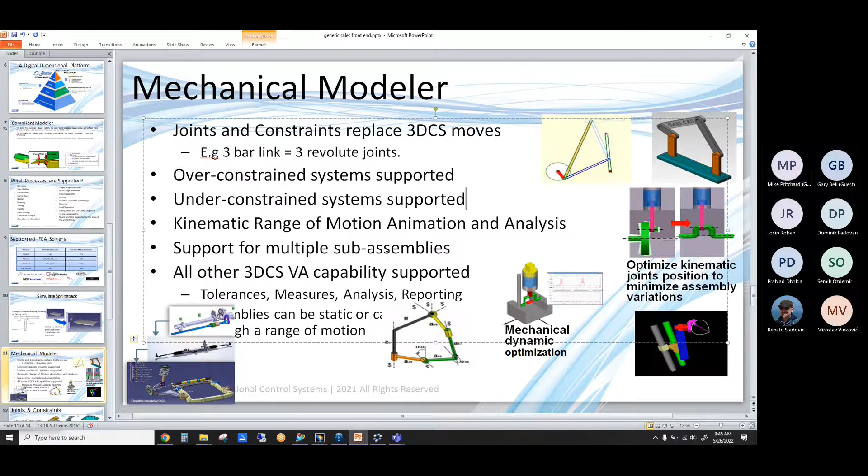One of the things from when Gary was going through that process that I want to clarify for everybody is, when you establish GD&T in 3DEXPERIENCE and we extract it, we'll validate it. So you've got two levels of, let's call it GD&T security. When you're in CATIA, you've got an advisor. And then when we bring it in, we'll tell you if you missed something.

Same thing when you take a drawing, right? When we do it manually, when we take a drawing and look at the GD&T and create 3DCS GD&T, then we'll validate that the GD&T on the drawing is good GD&T or not. So don't overlook that commercial element to this process. We have customers saving $60,000, $70,000, $80,000 a part because they're cleaning up the GD&T big time.

So we help our customers gain digital efficiency and further leverage their CAD system by simulating builds, the very elements of your work as mechanical engineers, now from the V6 desktop, the ability for you to make decisions rapidly.

Now, after the meeting, I'm gonna send a video that one of our customers did. What they're doing is they've got a 3DCS model. They get CATIA. They get a scan of the part. They'll take that 3D scan and tweak the geometry in 3DEXPERIENCE and then rerun the 3DCS analysis. So again, a build reflecting the reality of your inspection data, whether it's 2D or 3D.

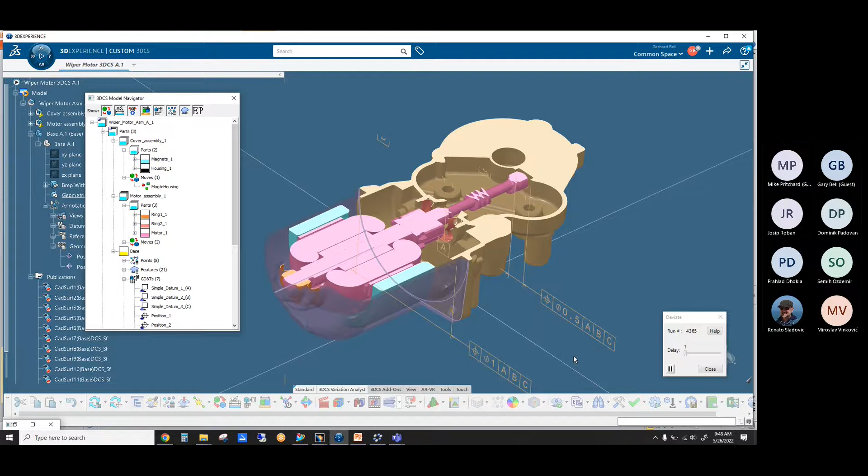So what do you think? Are we barking up the right tree, Josip, in your search for a tool embedded in 3DEXPERIENCE that can simulate your tolerance stack-ups? Yes, for now it looks pretty good. Just to ask you one question about GD&T, is it both on ISO standard and ASME? Both ISO and ASME. Okay, great.

Okay, now I'm going to ask Gary to bring up one more slide. That's the pyramid. And this is important because this is what's going on in the automotive community right now. We showed you variation analyst.

That's worst case, RSS and Monte Carlo statistical output with all those distribution options. You can go very, very deep with a Variation Analyst model, and that is typically used by a mechanical engineer. We also have DVM, Design Variation Modeler.

So our customers, instead of doing 1D linear RSS and worst case stacks in Excel, are doing it from the 3DEXPERIENCE desktop. They're doing a 3D worst case and RSS stack. And so design teams, they're responsible for design, but they want to get a quick stack of the worst case and RSS just to make sure they're heading down the right path. They can do that with DVM, very easy to learn and use.

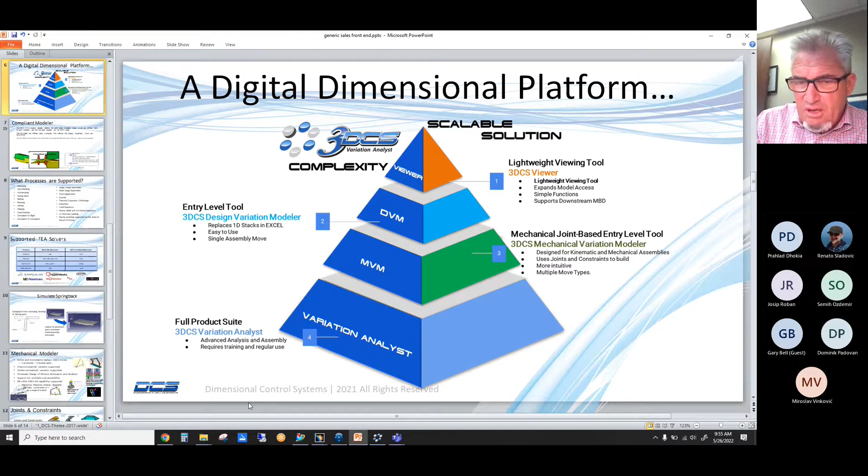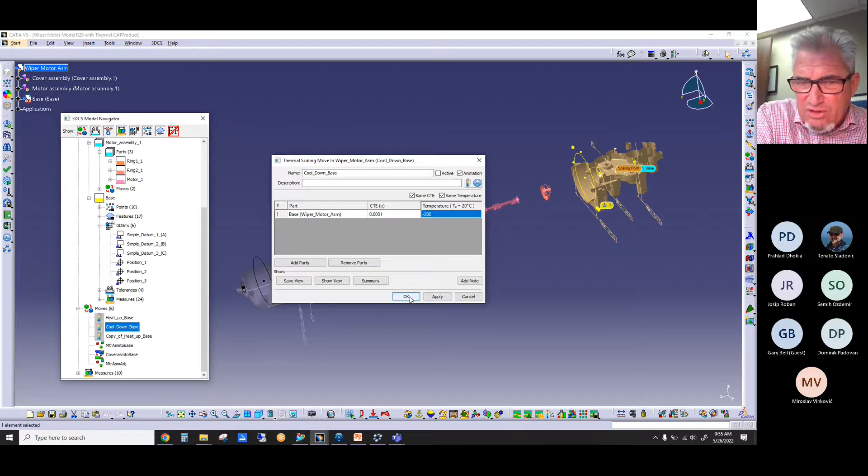Because what you see today is truly reflecting what we deliver to customers today. And that's why we've got so many customers across automotive. But we also understand that every customer wants to make sure that a tool is aligned with their processes. So we'd be delighted to take more steps along those lines.

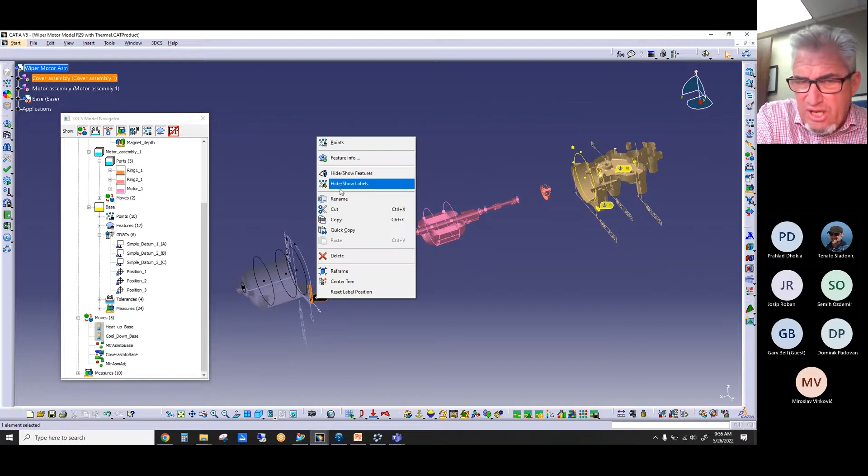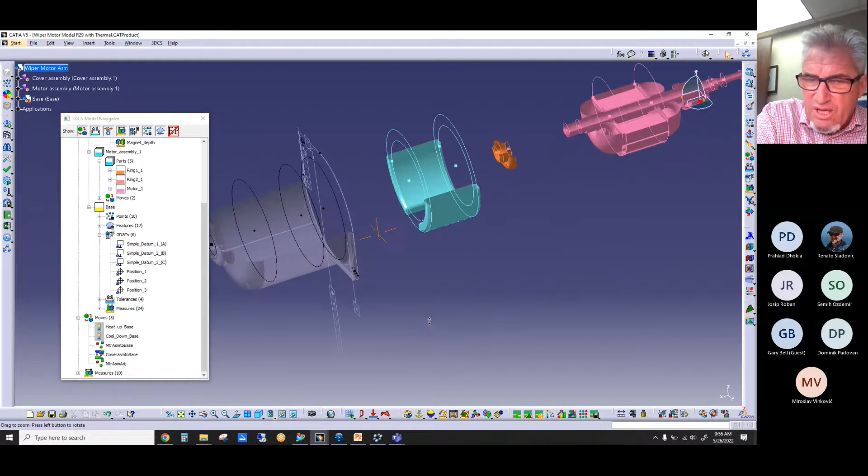But a key question, that I think you've already answered, is, we always got to know, are we barking up the right tree? Are we in the ballpark, so to speak? So if you think that, and it sounds like you're confirming that, if we're 60, 70% in your ballpark, then let's use these evaluative steps to make sure we're 100%. Yeah, I definitely think we're barking up the right tree. I mean, it's definitely something that looks useful.

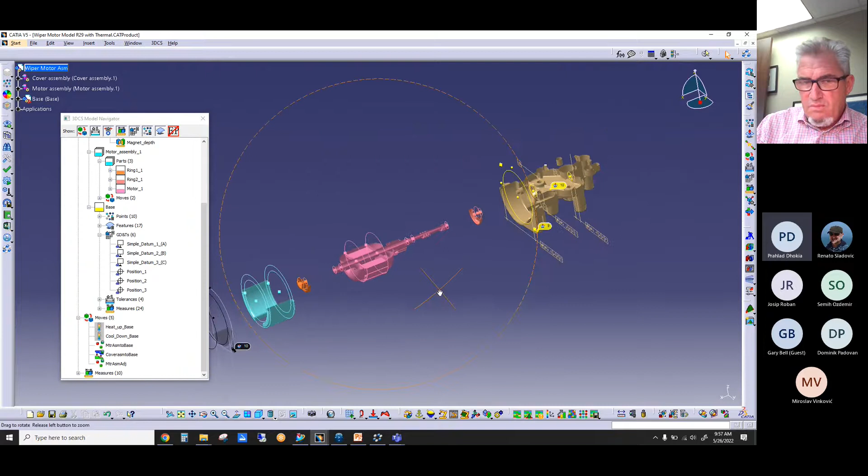So from a data sharing point of view, I'm not really sure how much we can really share. Obviously a lot of the stuff we have is very sensitive, so we would have to discuss internally before we go down that route. And I guess the other thing as well is training. You said 12 2-hour sessions. That's obviously quite a long block of time that we all need to free up to do that. That's official training. I would say this is the full scale training. This is not part of the.

I definitely think though that training would be required. I don't see how any of us would be able to shortcut our way into understanding how to use this sort of software to its full extent. One thing we have been doing that might work for you is, because you're evaluating it, you want to make sure it looks promising. So what we'll do is we'll extend a copy of the software, and we'll have a workshop to give, let's say it's Josip, a look at the tutorial and get them headed down the path of the GUI and some of the fundamentals.

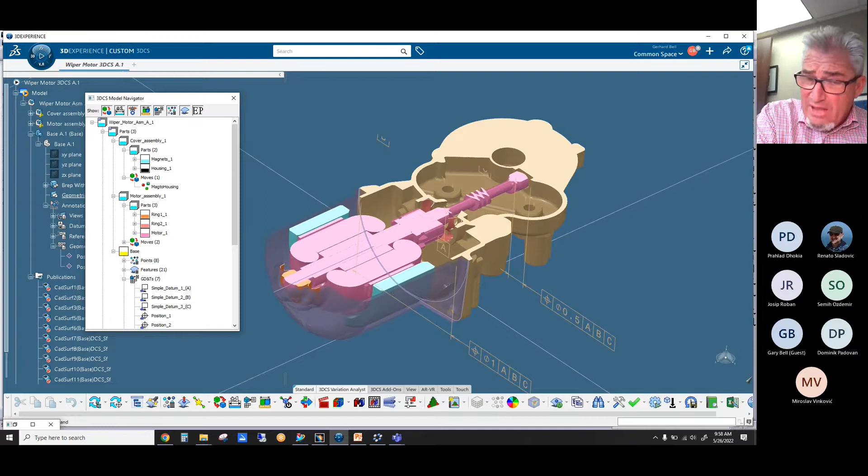And all of my customers who have taken this path have found after that first or second session that they were able to confirm that 3DCS was aligned with their vision. Then we would proceed to making a quote for software and that formal training. And then, yes, the training would be basically continuing on with the tutorial and then applying it to Remots parts and assemblies once we get through the curriculum. That sounds great to me, because you cannot know before you start working on it what's the deal with it. So I like that. Yeah, I do too.

I do too, because we have a saying here in the United States, Josip, that everybody's from Missouri. Missouri is called the show me state. So we say everybody's from Missouri because everybody wants you to show me. And in this case, it's the same thing, right? You want to be shown that 3DCS is good for Remots parts and how you might use it.

So talk as a team, and then I can work directly with you or whomever, and obviously I'll keep Renato in copy. If I was working directly with Josip, I'd have our IT guy extend a copy of the software. And once that's installed, we could set up a workshop, same time. And over the course of a week or two, you definitely get a good feel for how 3DCS is aligned with Remots.